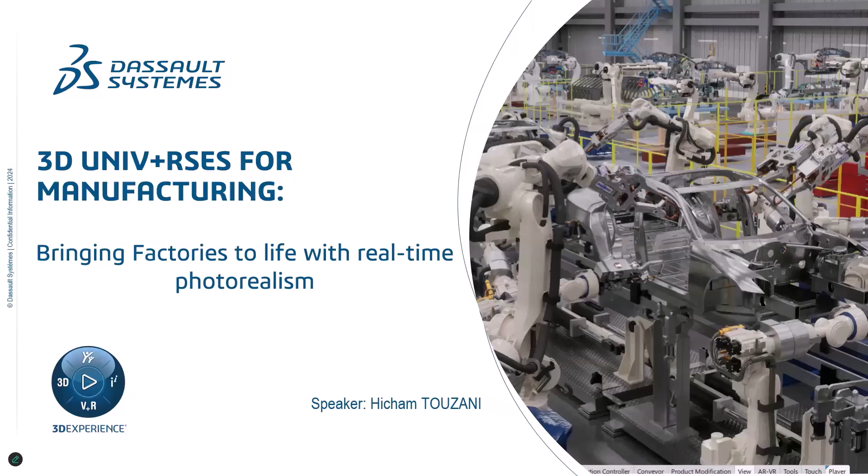I just want to start with a simple but exciting question: what if you could walk through your factory, test every robot, and feel the environment as if it was real? Sounds cool, right? I am Hicham Touzani, robotic expert at Dassault Systemes, and today I'm really glad to show you how we can bring factories to life with real-time photorealism and how it can be applied in your industrial needs. It's not just a demo of the future, it's really happening right now. I'm really excited to walk you through that.

Before we dive into the demo and real example, let me give you a quick overview of what we will cover today. We will start by looking at why photorealism is becoming such a key demand in manufacturing. Then I will walk you through a body-in-white factory use case. We will show how we built an interactive photorealistic virtual twin entirely inside the 3D Experience platform. From there, we will explore the rendering engine itself, and see DELMIA layout capabilities. We will see advanced robot simulation, and at the end, we will end up with the VR walkthrough where you will see the factory from an operator point of view. So if you are really interested to see this, just stay till the end. If it is okay for you, let's move forward.

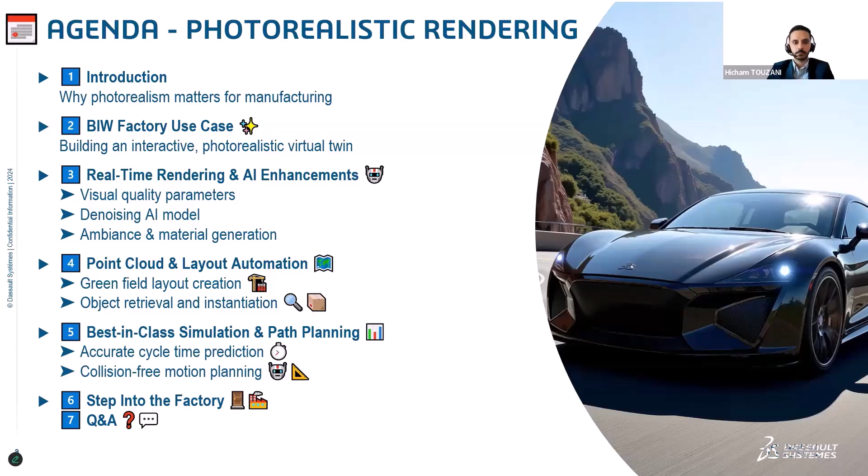Let's now understand why more and more customers are asking for photorealistic environments. The first thing that comes to mind is that it becomes a foundation for AI, by generating high quality synthetic data that can really mimic the complexity and realism of the physical world. You may have heard that more and more projects and customers are shifting from rule-based robotics to AI training, especially in dynamic environments, which drives demand for large-scale synthetic data. I'm referring to vision systems and robots involved in dynamic environments like mobile robots, for example.

The second point is the collaboration aspect, because teams need to collaborate in the same virtual twin, and this adds more context to their work. And of course, the third point is that it can also build trust with stakeholders, because if they can see and understand, then they can validate the concept visually.

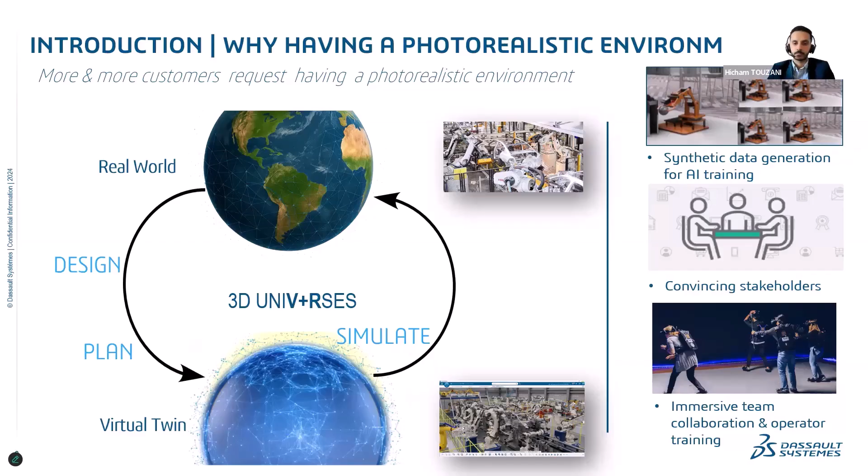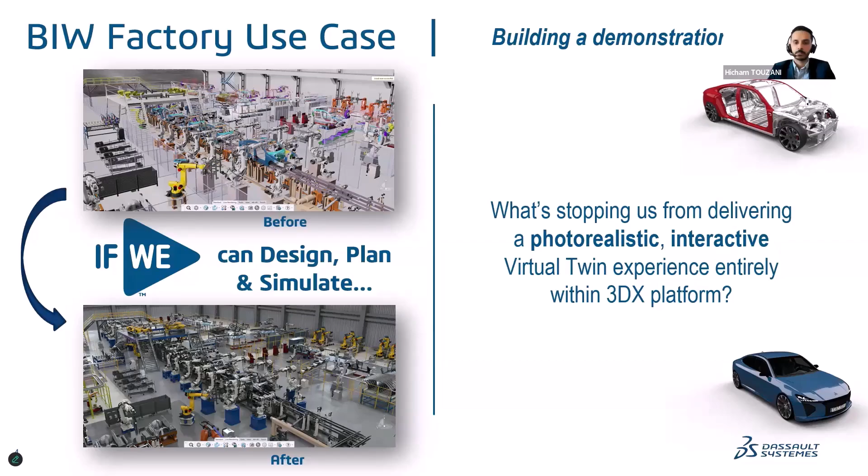Today, this project is a direct expression of Dassault Systemes' vision, where we bring together design, simulation, manufacturing, and collaboration inside one unified platform, grouping together the 7 pillars from the virtual twin to generative experience to virtual companion and to sense computing. In my opinion, this will have a huge impact satisfying the needs of our customers today.

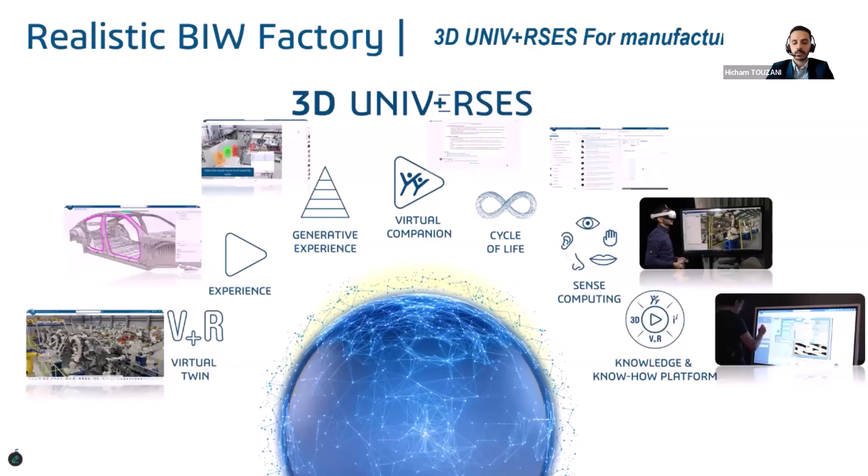And talking about the needs, we have identified three major pain points across manufacturing. The first one is the need for scalable AI training, which starts with synthetic data generation. What used to require massive manual labeling and real world capture can now be generated inside the virtual twin, varying many parameters like lighting, angle, object variation, and environment, which helps train the AI model and make it more generalized.

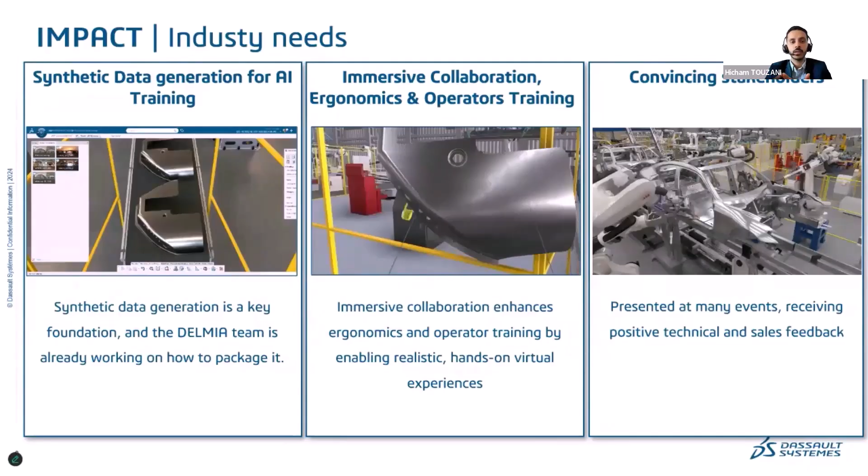The second point is the need to train and onboard operators, especially in complex environments where security matters. Immersive collaboration lets teams practice, validate their ergonomics, and even refine tasks in order to anticipate errors.

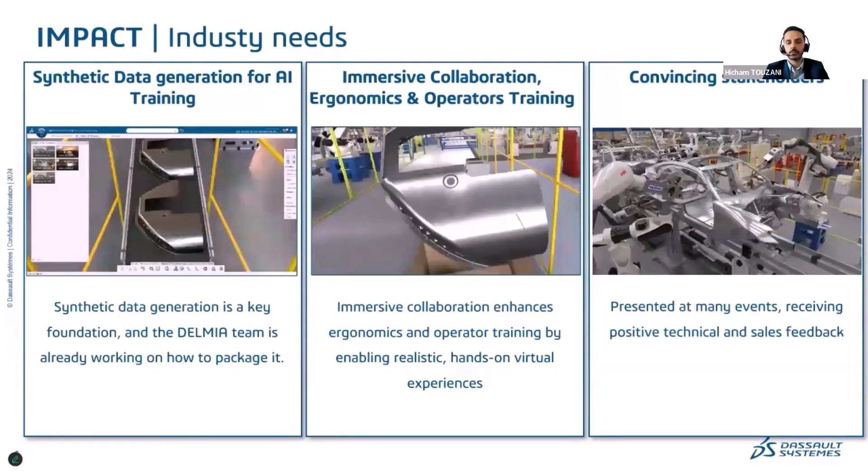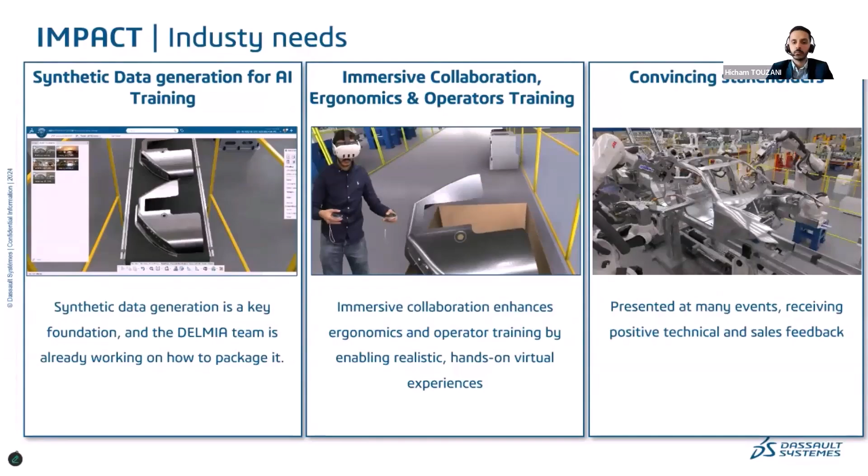And the third point, as discussed earlier, is the need to convince stakeholders, for example for internal sign-off or customer validation. Photorealistic environments make the concept more clear. Just keep in mind that this is where the industry is headed today, and we are already building the tools to meet those needs today.

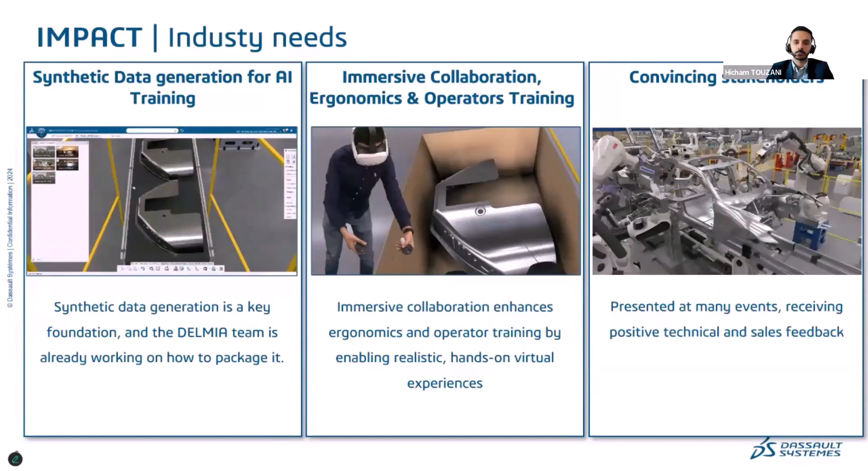Now, let's be honest, visual quality is something people notice immediately. And today we are working with the 3D, so it's the first thing we notice. As you can see, just by varying the ambience, we can see a huge difference.

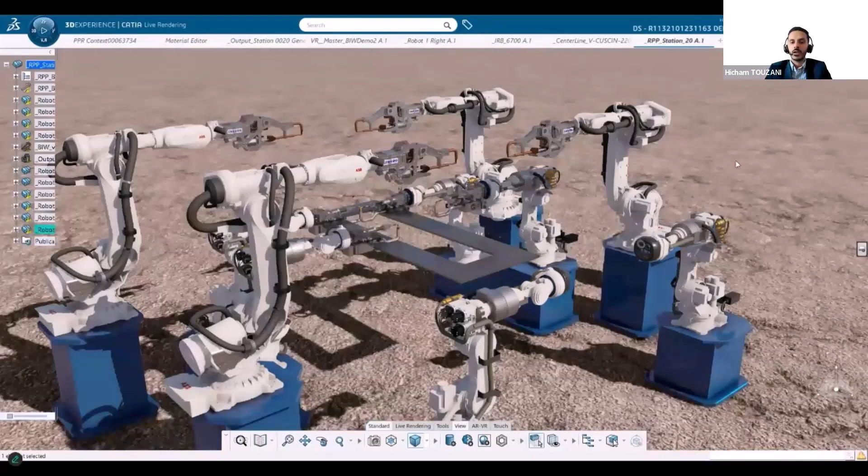We have out-of-the-box functions where we have good rendering, introducing the lighting, the reflection, and so on. As you can see here, we see the reflection just by changing the visual quality, where we introduce real shadows, reflections, and so on.

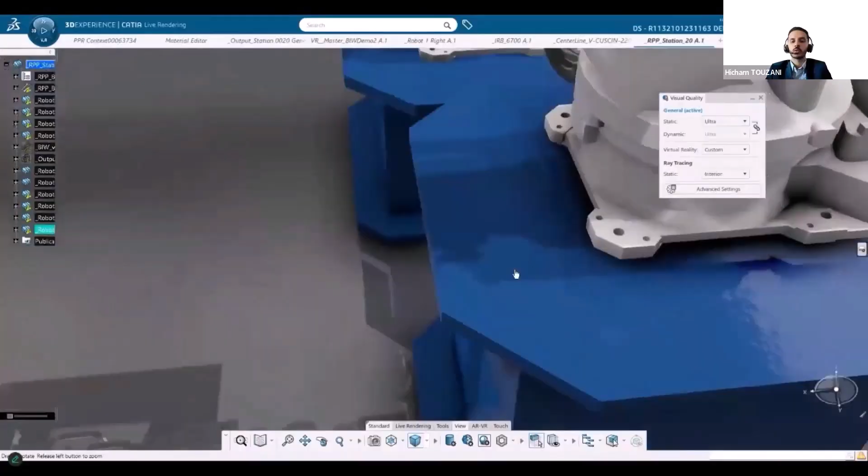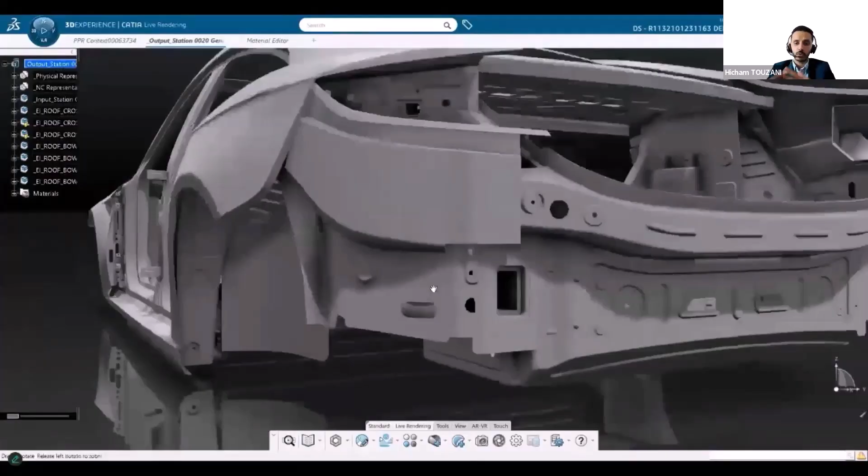So the other parameter is the ambience and the materials. As you can see, we have a wide library of materials, and basically it's one thing to have the right geometrical layout, but when you start applying realistic material like steel, rubber, glass, or paint, and if you choose the correct texture, everything just clicks visually.

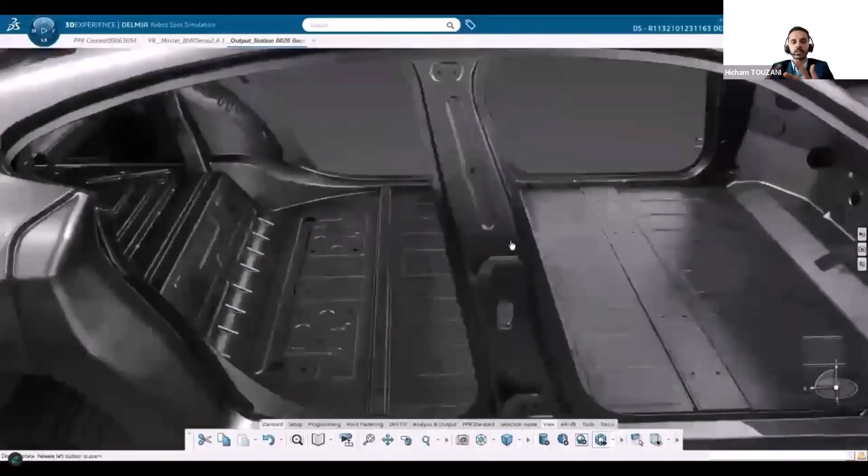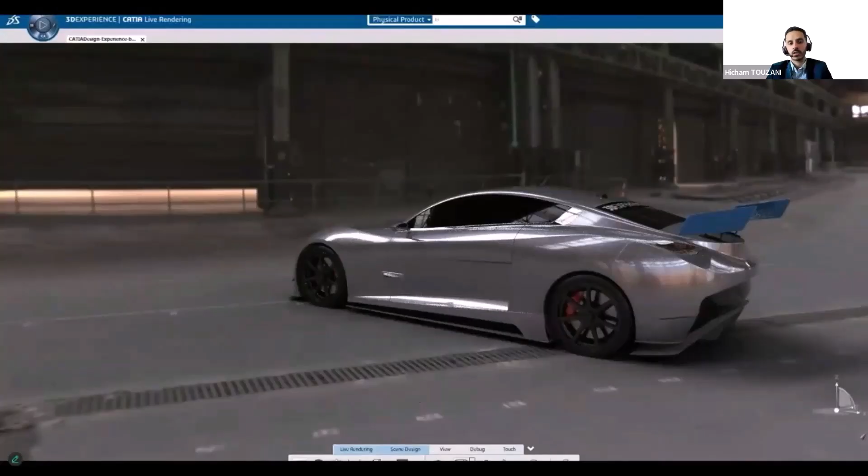So basically, you get really this sense of realism, and this is where you refer to something you have seen in the real world because you have the right materials, the right reflections. And as you can see in this example, we have also a wide library of ambiances that you can really use out of the box.

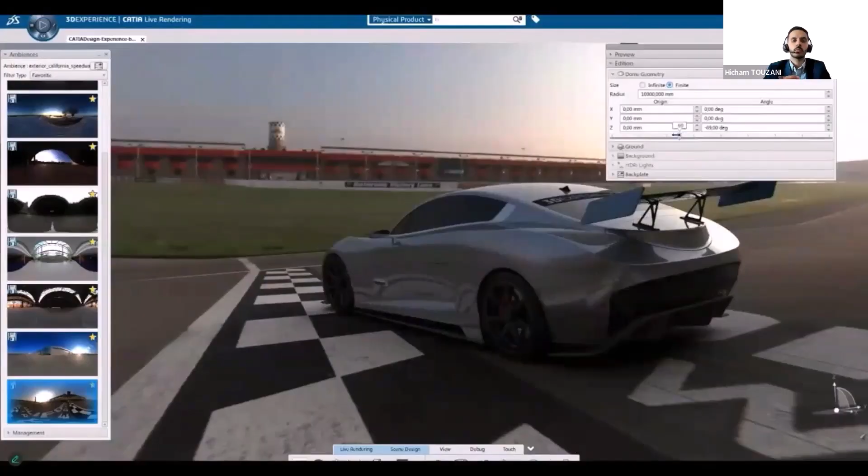But you can also import your ambience from an external source, so we are compatible with that. Here you can see that just by varying the ambience, the lighting changes. So it adds also more realism if you play with the parameters and so on.

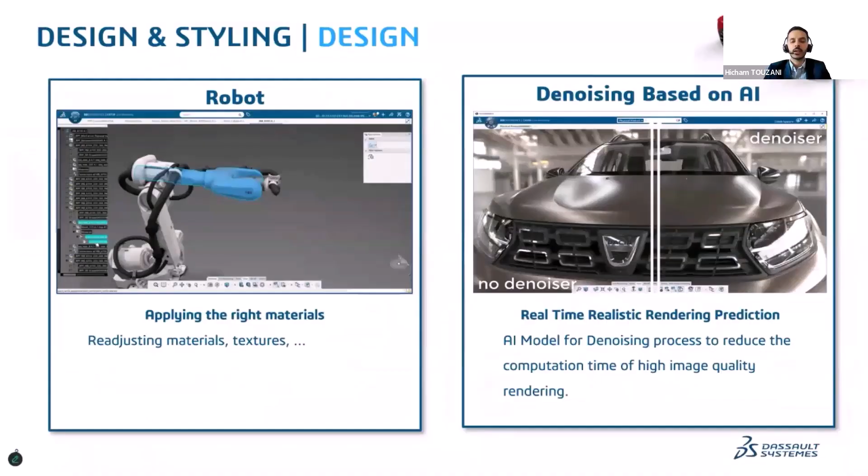So moving to the design and styling, this example focuses on how to import existing materials. So basically, in this example, we play with the texture. I have imported the material that I have created inside the 3D Experience platform. And in this example, you see how we applied this to the equipment, such as the robot in this case.

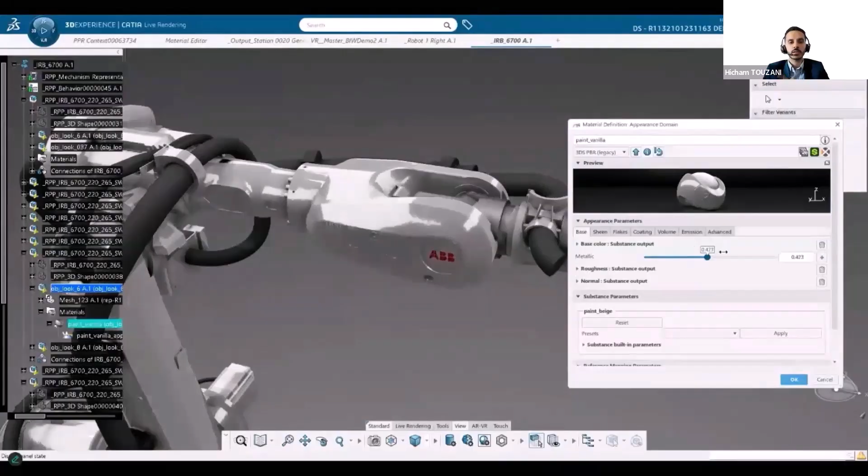I can vary the metallic side of the robot. I can even vary the texture of the robot and so on. So I have created many parameters to make the robot more shiny, more real. This also helped to add realism into your factory.

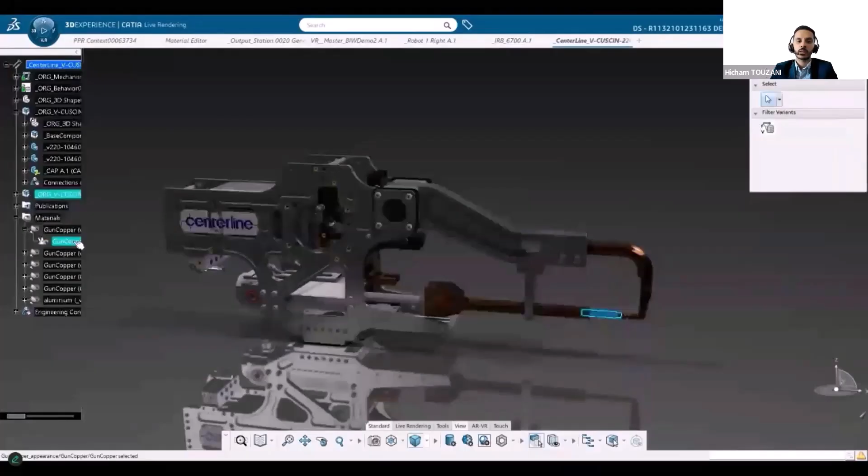And then moving to the weld gun, we have done similar things. So we have adjusted also the materials of the gun and so on. And we did that on the factory itself.

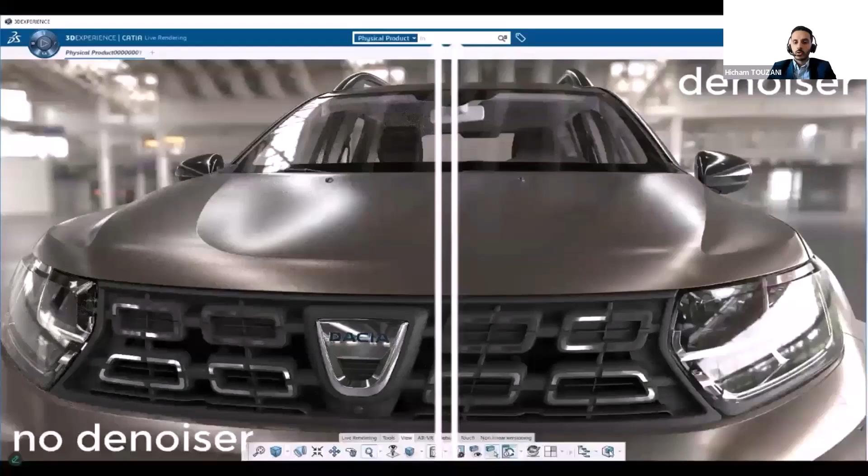So in the second part, we can see how we brought AI into the creative and styling phase of the product design. So we have basically the denoising capabilities, because a high quality rendering usually comes with high computational costs, especially when simulating lighting and reflections. And our AI-based denoising model predicts the final results quality in real time.

So you can see on your left, this is without denoiser. On your right, with the denoiser. You can see that with the denoiser, we are converging really quickly to a final image with a good quality. It's a matter of 1 second or less. We are converging really quickly to this. So all of this to deliver photorealistic visuals.

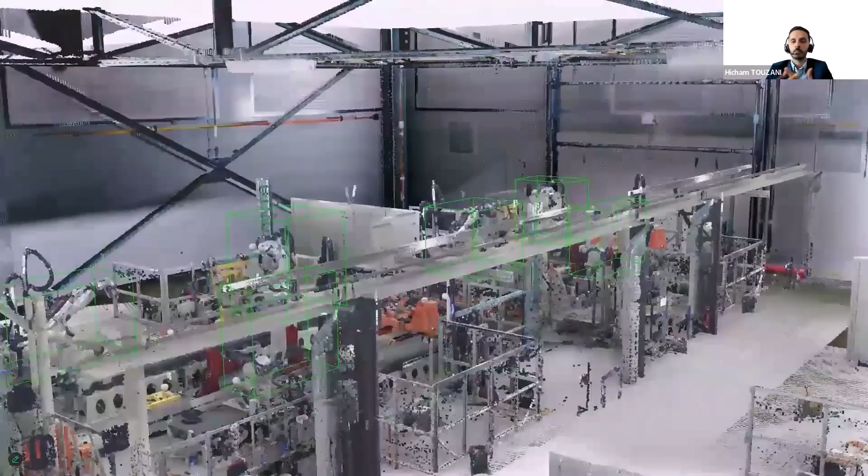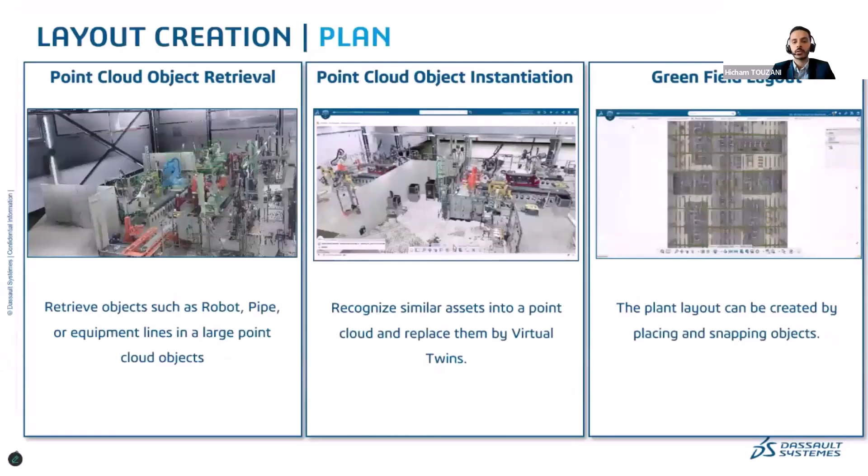So starting with the layout creation, we can see on the left, we start with the point cloud object retrieval. So we import our point cloud, and we can also use our AI capabilities to detect objects in the scene, like robots and so on.

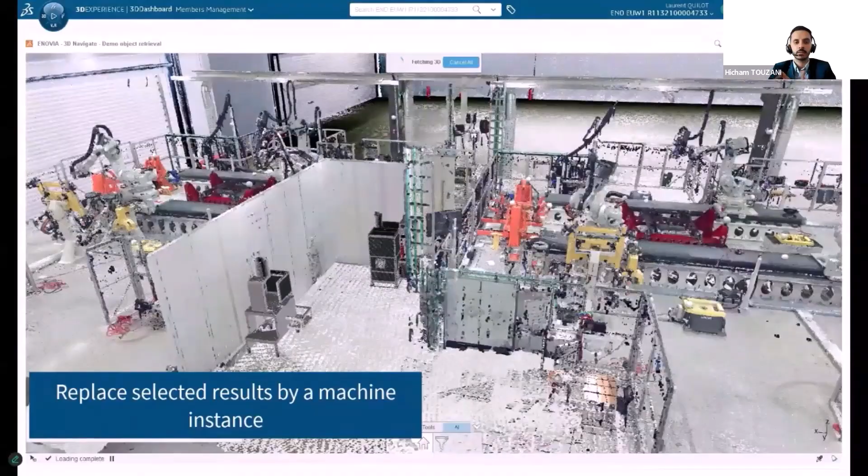And we even go further by identifying the objects that you have in your database and replacing them altogether. So if you have many pieces of equipment inside your scene, we are capable of first identifying them from your database and then replacing them directly on your point cloud. But of course, you can still use also the point cloud for collision detection and so on.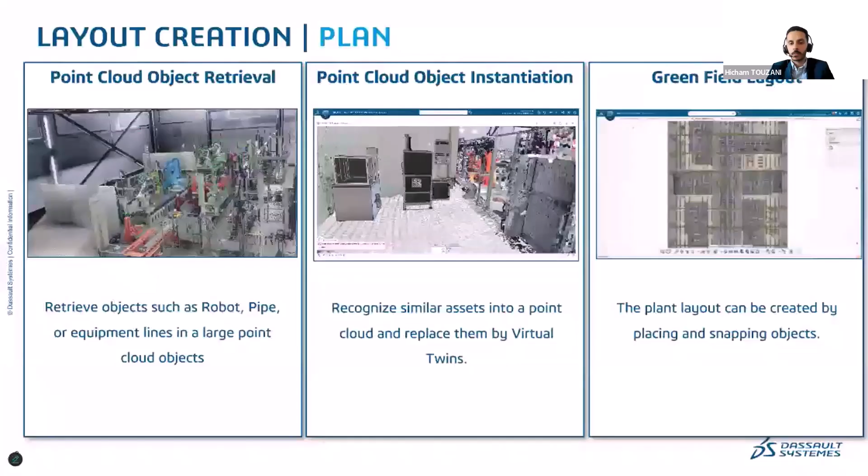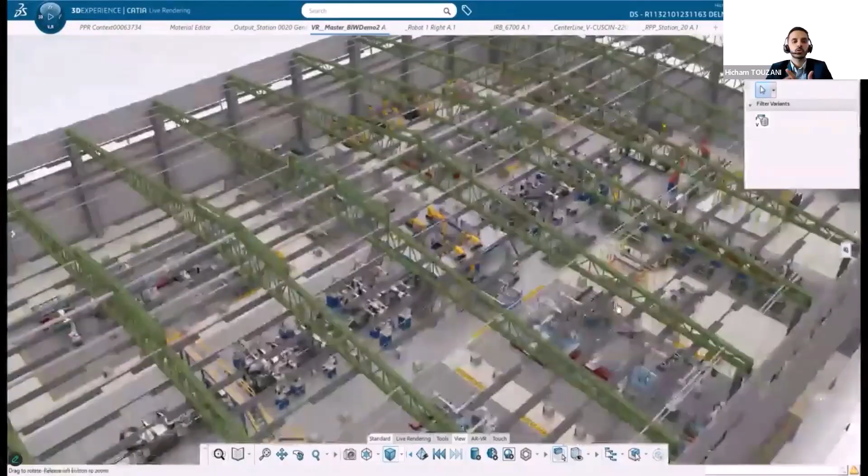So the third part is, I would say, the scope of this project, because we started from a greenfield where we have used DELMIA plant layout solution in order to build such a factory. So we have used all the capabilities that we have inside DELMIA layout, the snapping capabilities, the measurement, 2D sections, and so on. This was really helpful in order to create such a virtual twin.

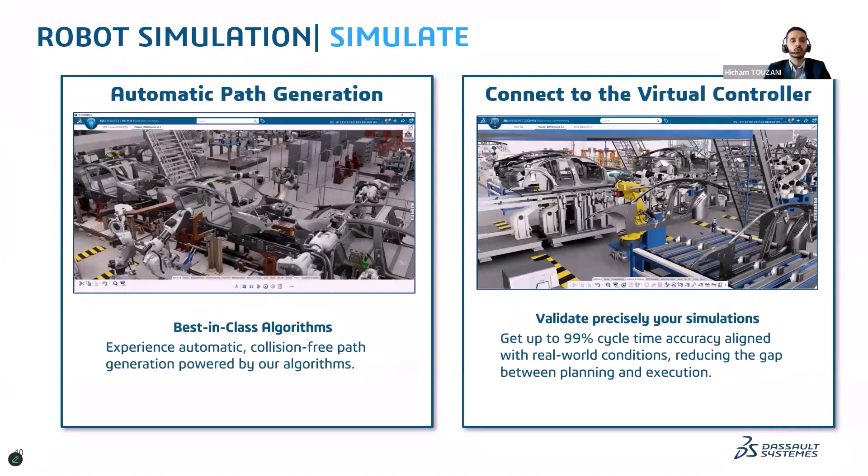Okay, now moving to the robot simulation part when we need to simulate. So basically, we have used also best-in-class algorithms proposed by DELMIA in order to simulate, but also to generate the path automatically. I'm picking this example because it's really interesting.

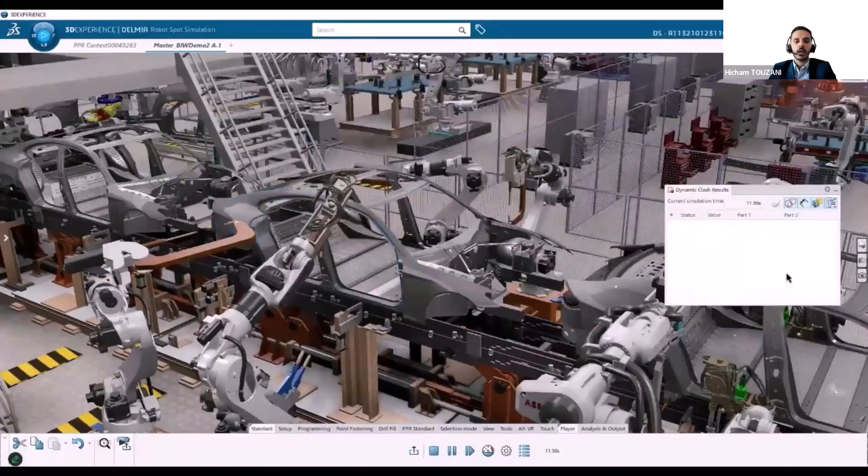Starting from a task where we had many collisions, as you may see here in the screen. We start from this task when you have only spot operations in your task. You may have also some home position from the top to the end. And here you can see that it's not really an obvious movement to solve.

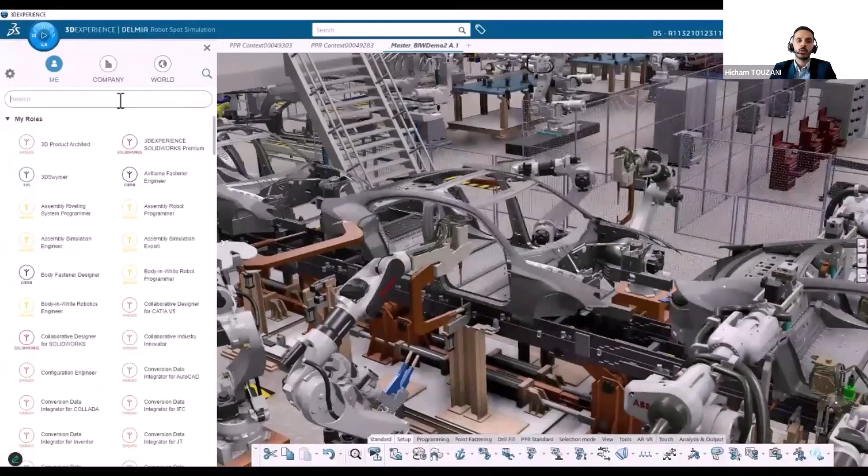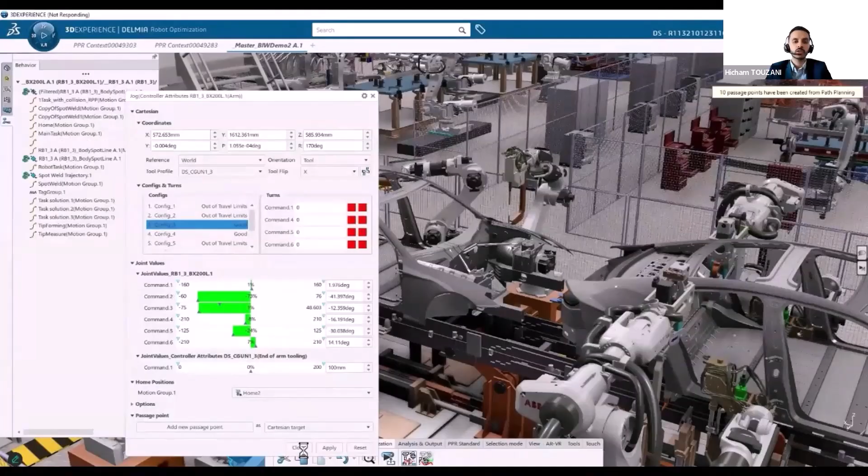Here we are just having spot operation in our task. So we are giving it as input, and we are using our robot optimization app in order to solve that. So basically, instead of doing the via points manually, our algorithm is able to do this for you. It's automatically generating via points between the spot operations where you have the collision, first in order to solve the collision, but also in order to minimize the cycle time.

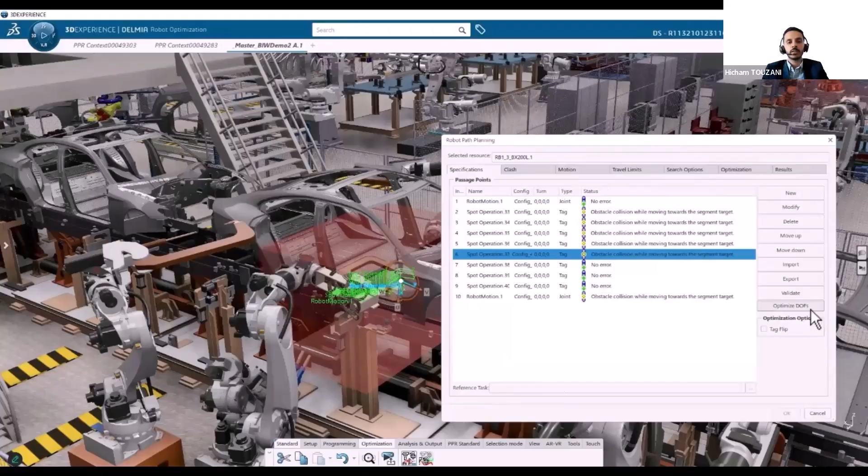As you may see, we can start first by validating the initial task or validating the input task. Basically, it will check if everything is okay or if you have any collisions while moving towards a segment target. We can even go further by optimizing the degrees of freedom. To reach a point in space, you may have more than one configuration, and optimizing the degrees of freedom means we will reduce the configuration changes, which can be unnecessary in some cases and can also drastically reduce the cycle time.

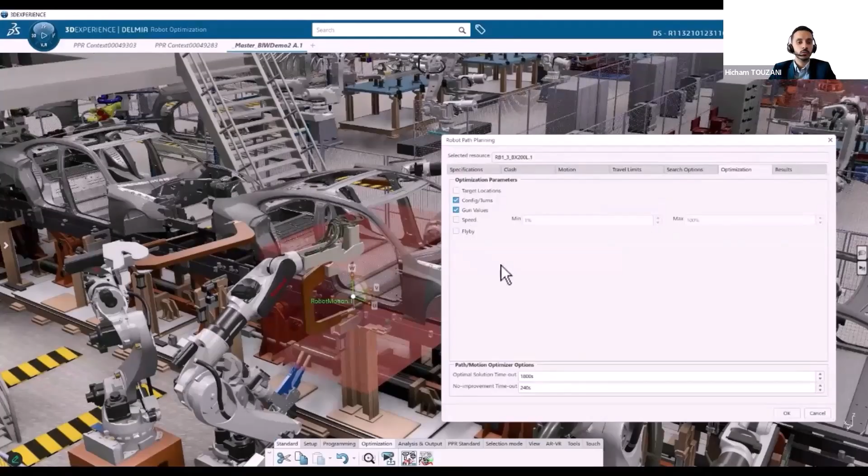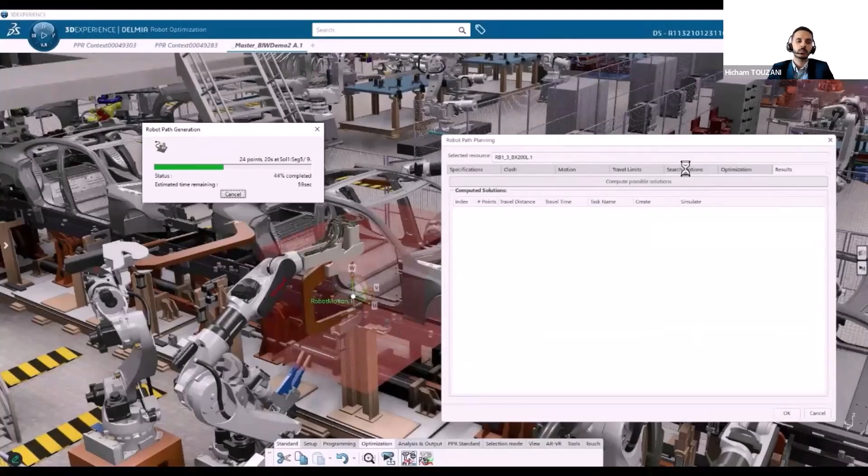But we can also go even further because we can include gradually, or even at once, a lot of constraints such as the gun values, so the opening and closing of the gun. We can introduce the config and turns and even add some flyby motions. So as you can see here, we just compute our task to get a task free of collision, but also the algorithm is picking for you the best trajectory, which minimizes the cycle time.

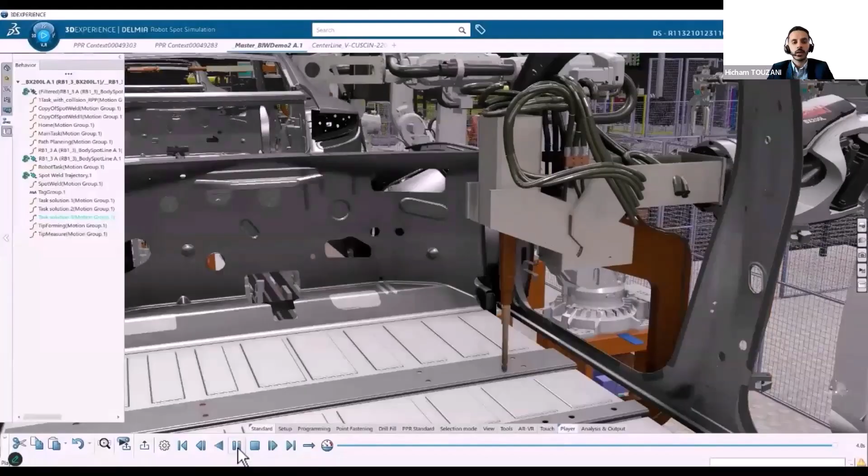So after some calculation, we will see how the algorithm will introduce the via point. The algorithm is checking for the best possible option, and at the end we have one task without any collision while minimizing the cycle time. As you may see, the algorithm introduced automatically the via points. It introduced also the opening and closing for the gun, so the 7th axis of the robot, and everything automatically. This saved us a lot of time in order to simulate our robot inside this virtual twin.

The other part is connecting to a real VRC. So you can see, with such photorealistic visuals, we can even work in it real time. We can connect to the VRC, virtual robot controller, and in this case we picked the FANUC robot.

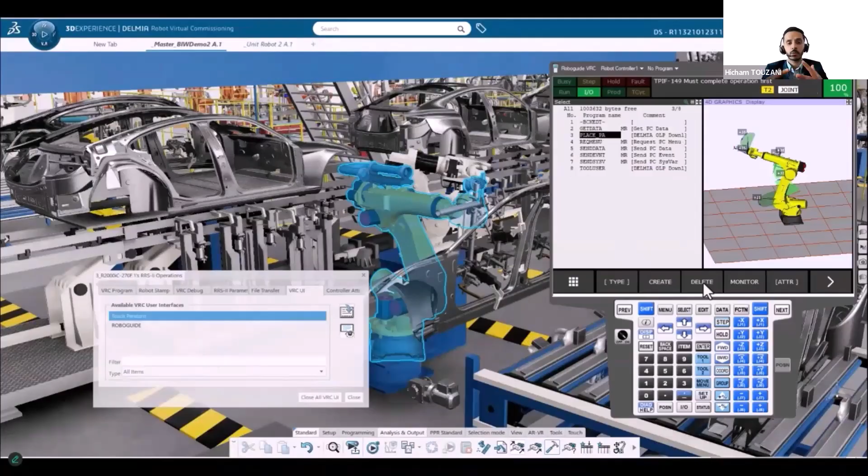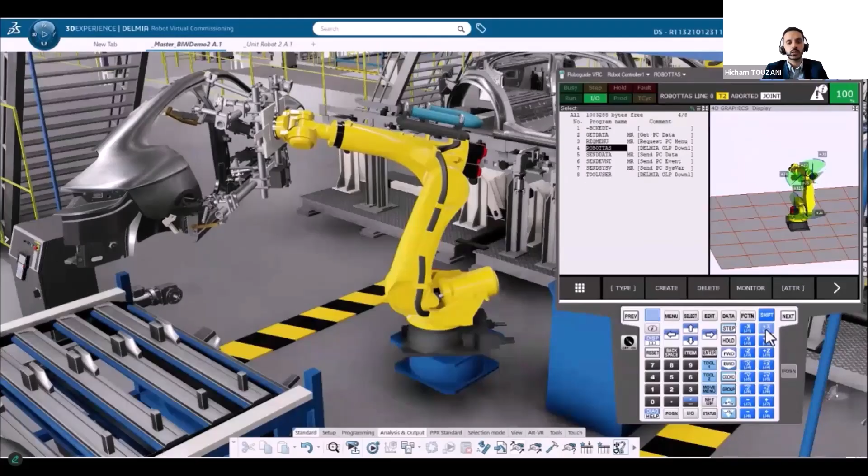You can see that we can even start the teach pendant from the 3DEXPERIENCE platform. Basically, so we can transfer the robot program, like from a backup or something, or even teach the robot. So you may have operators that are really familiar with the FANUC teach pendant, so it can be used also for training in the virtual twin by using the real teach pendant. As you can see here, we can teach the robot as the following.

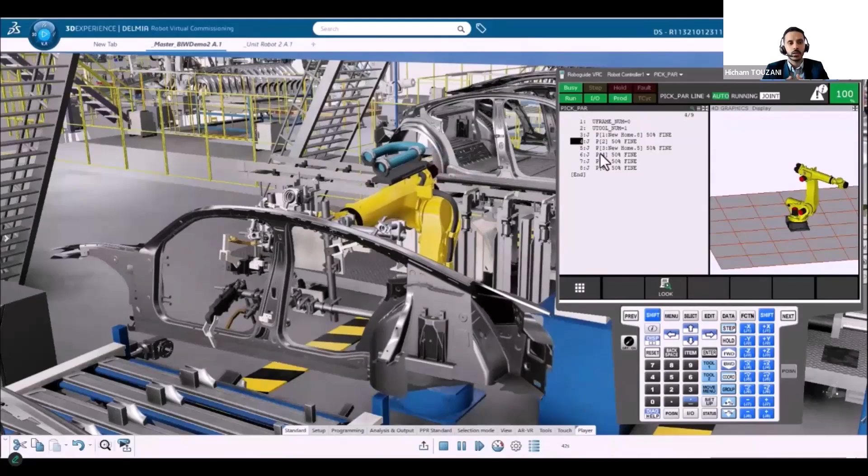And basically we can also do more than this, because starting from DELMIA, you can do your program in DELMIA, you can create your task, and we will translate everything in the background and send it directly to the VRC. So basically what you have to do is just click to pick your task, connect your VRC, and then click on play, and we do everything for you. It's transparent for the user because the translation and the sending to the VRC is done in the background.

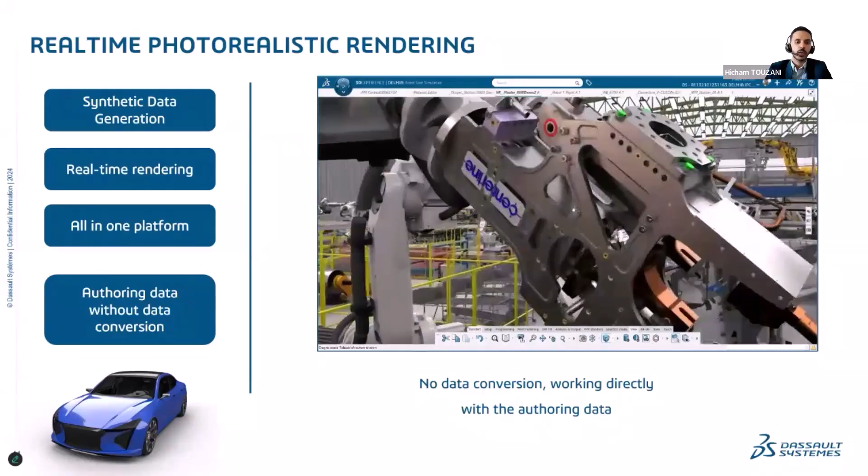And coming to the real-time photorealistic rendering, one of our differentiators is that we are real-time. We do everything all in one platform, and we are working directly on the authoring data, which means no data conversion. So we can design in CATIA and then move to DELMIA for simulation or planning, then go to the virtual commissioning when you connect to VRCs, when you have your virtual twin and your PLCs all interfaced in one platform. This is a huge differentiator that we are proposing today.

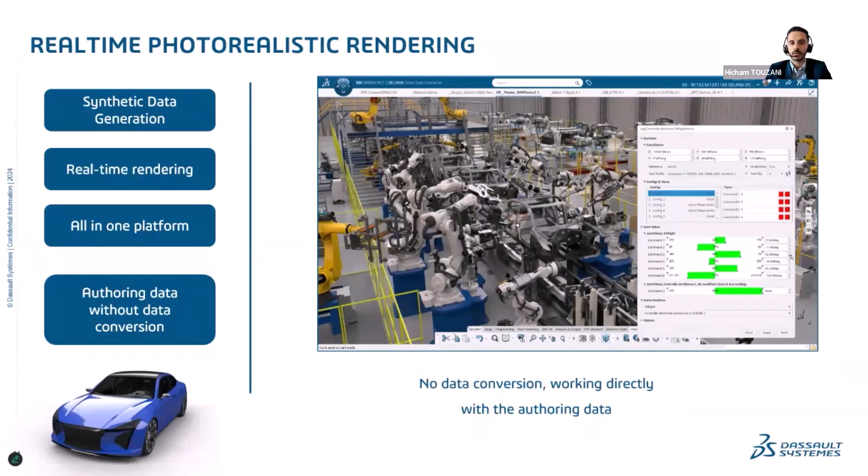So what I propose now is to let you watch a video explaining more the journey from the design to photorealistic simulation, where you will learn more about how we started and how we get to this photorealistic simulation. So just enjoy.

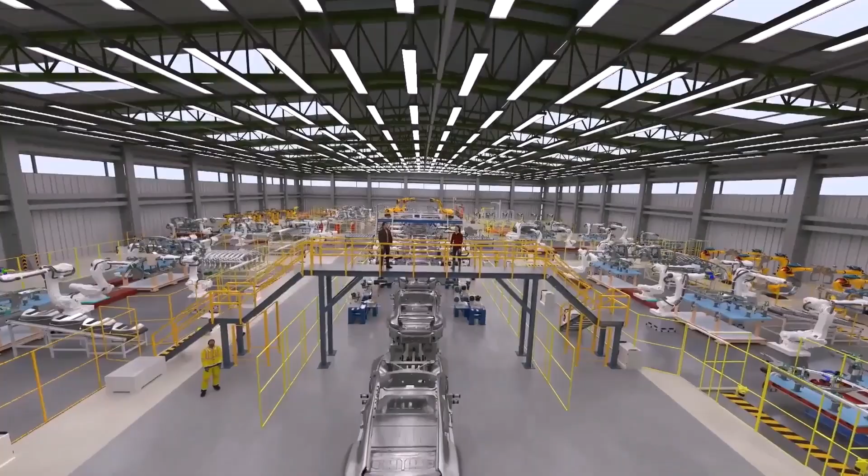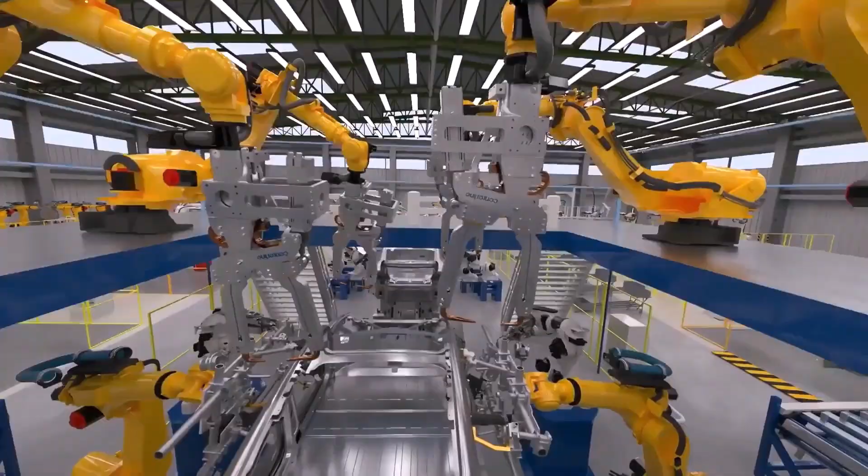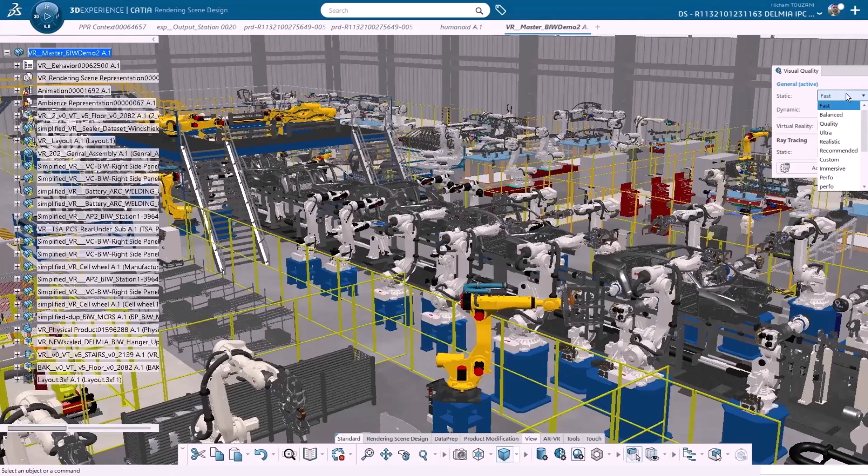3D Experience is redefining industrial digital twins by bringing design, simulation, and real-time collaboration together in a photorealistic 3D universe, opening a new era of immersive manufacturing. From the structure to the last robot weld, every detail is accounted for, visualized, tested, and validated before a single machine is powered on. This is not a render. This is the future of manufacturing, authoring in real time with full fidelity. Welcome to the 3D universe powered by the 3D Experience platform.

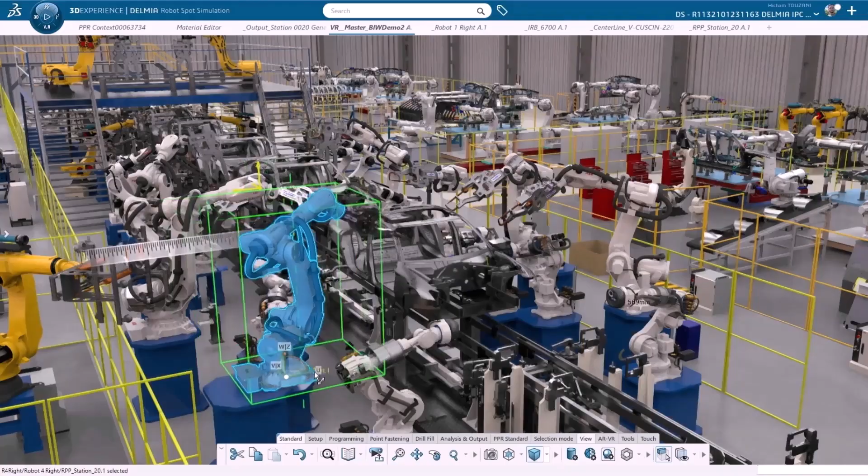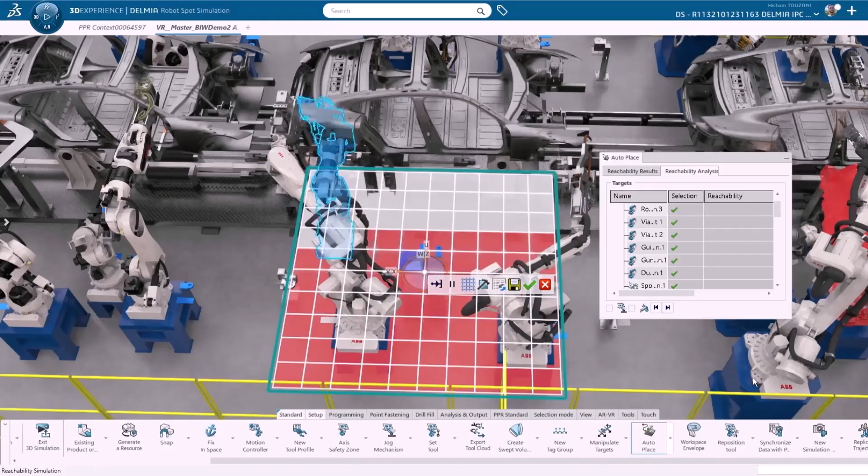In today's fast-paced industrial world, success depends on your ability to move from concept to execution without friction. That's why we've unified best-in-class technologies: CATIA for design and DELMIA for robotic simulation, all in one platform, in one data model. No imports, no conversions, no compromises. The 3D universe is not a visualization tool. It's a live, interactive virtual twin where engineers design, simulate, and optimize manufacturing logic directly inside the operational environment. Whether you're planning the factory layout or refining multi-robot interlocks, every move happens in context, accurate, reactive, and ready for production.

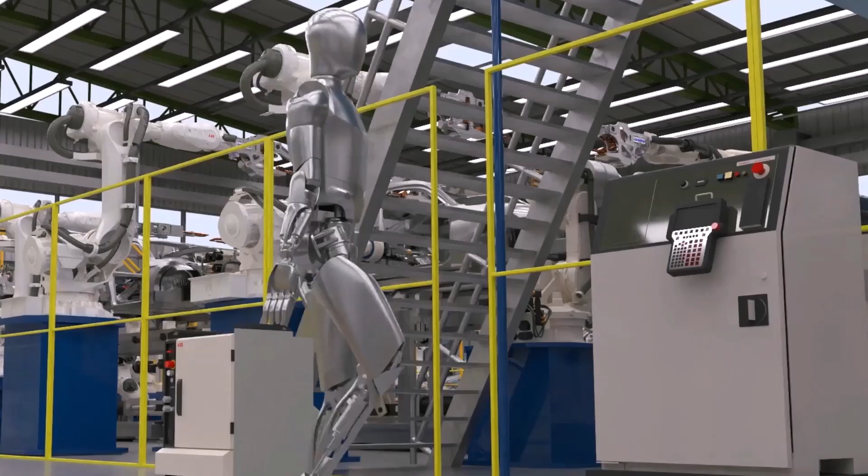But the value goes far beyond simulation. This immersive twin becomes the foundation for AI with synthetic data generation, feeding smarter logic into robotics, vision systems, and production analytics. You don't just simulate reality, you use it to train and improve.

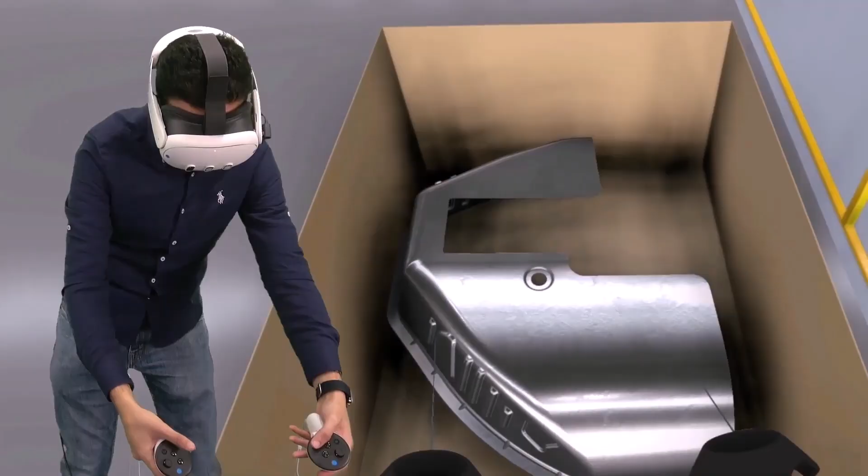Operators step into the process early, practicing tasks, validating ergonomics, and identifying risks, all within a high-fidelity, immersive environment. When teams work inside the same twin, whether in design, manufacturing, or logistics, collaboration becomes immediate and grounded in real processes. This is manufacturing without guesswork.

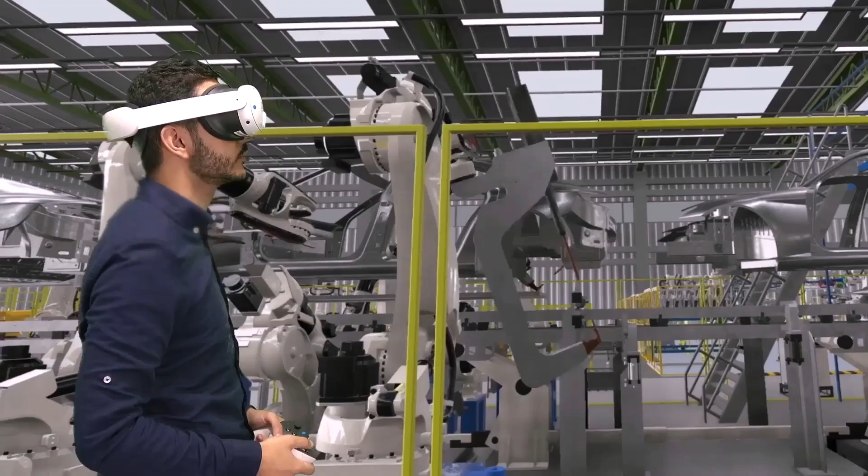A virtual twin built not just to impress, but to produce, improve, and evolve. It's a new foundation for manufacturing agility, powered by unified authoring, real-time simulation, and immersive training only possible inside the 3D Experience platform.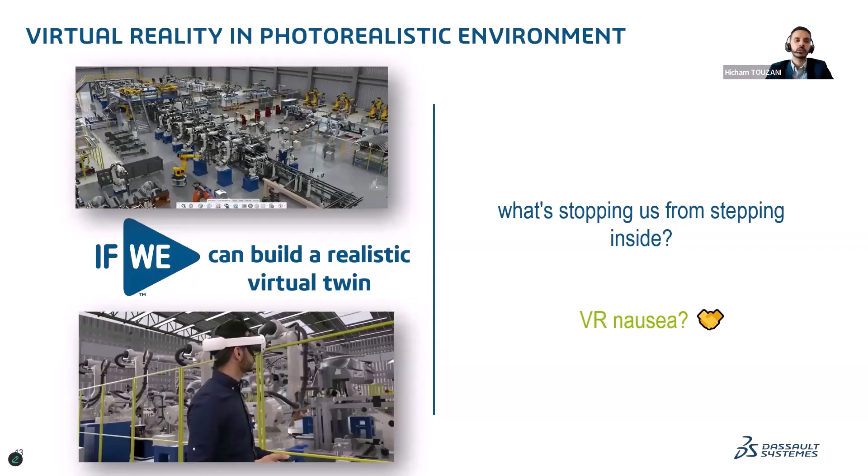But before, I will be showing you all our capabilities in VR today, or at least the best functions that we have today, starting from simulating and animating your task. So basically, you can reuse your task or simulation in DELMIA inside the VR. You can simulate using our VR for manufacturing function, which enables you to simulate and animate all the tasks that have been performed, in order to discuss with colleagues and anticipate even for errors.

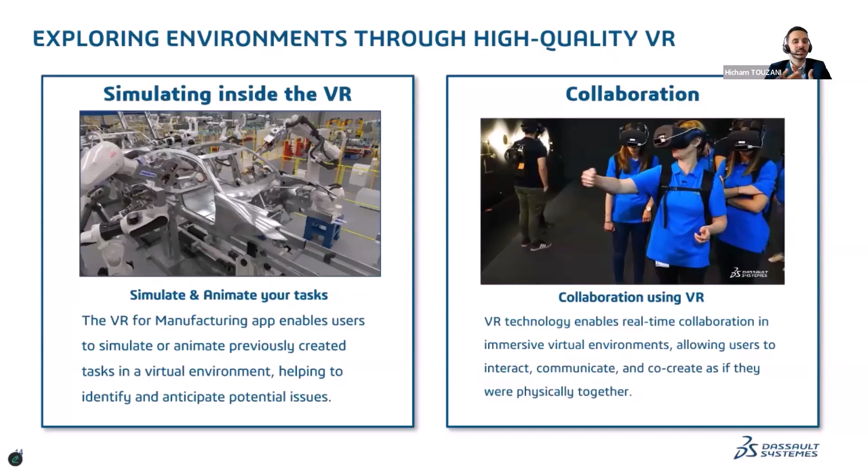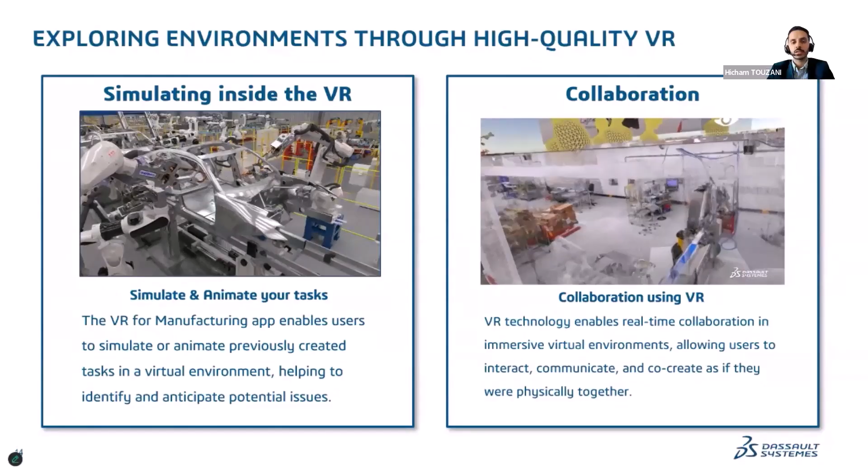On the right side, you can see that we can also propose collaboration inside VR, where your teammate or colleague can be in one site here and another in a different country, but you meet inside this virtual twin to have more conceptual vision. You can start challenging the layout even before it will be built physically. Of course, this concept is really useful, especially when you collaborate with teammates. This adds more value when you work inside the virtual twin.

And also you can even go further by interacting with objects in VR. So think about a meeting inside the VR, and you may want to challenge a layout. You need to propose or snap some equipment inside the virtual twin to see if you have blocking issues or if you need more space for your process, and you want to do this directly into the VR. This is also possible.

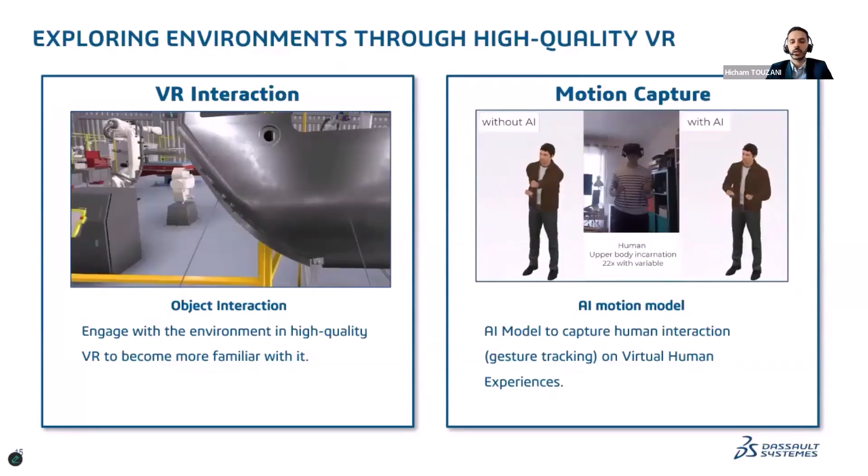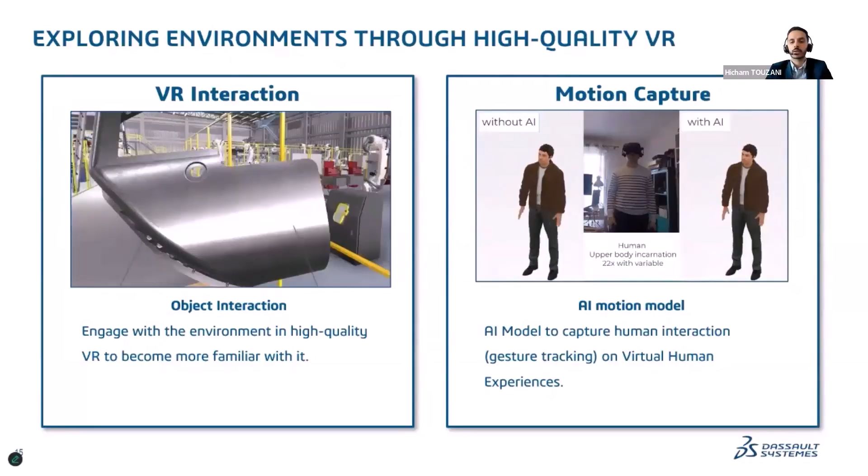You can also use this for ergonomics issues, to know exactly how it will look like in the real world. And on the second right side, you see that we have the human design, where AI enhances gesture and motion capture for virtual humans. This allows us to simulate realistic human interaction in immersive environments, for example to validate user ergonomics, to improve posture or other interactions with the product. Our AI model increases the realism and fluidity of human avatars, which is really interesting.

So to summarize, VR with high realistic rendering helps with ergonomics, helps train your team or operator, and improves team collaboration. And now, as promised at the beginning, I will give you the opportunity to put your virtual headset and step with me inside the factory from an operator point of view. So let's do it.

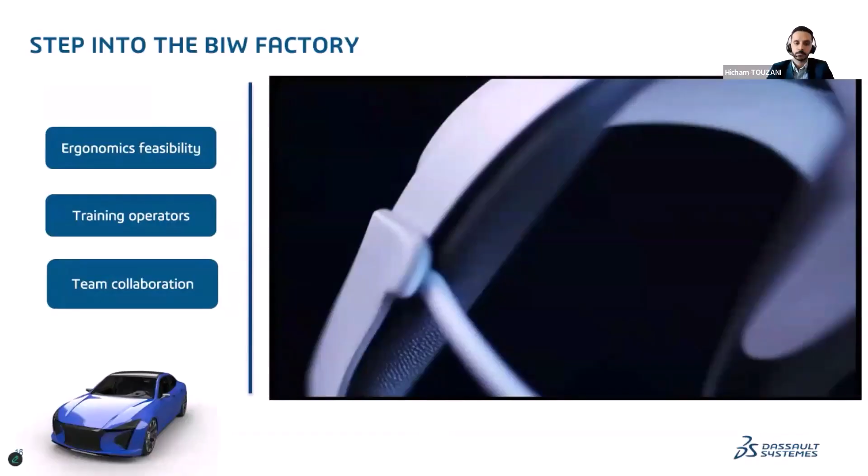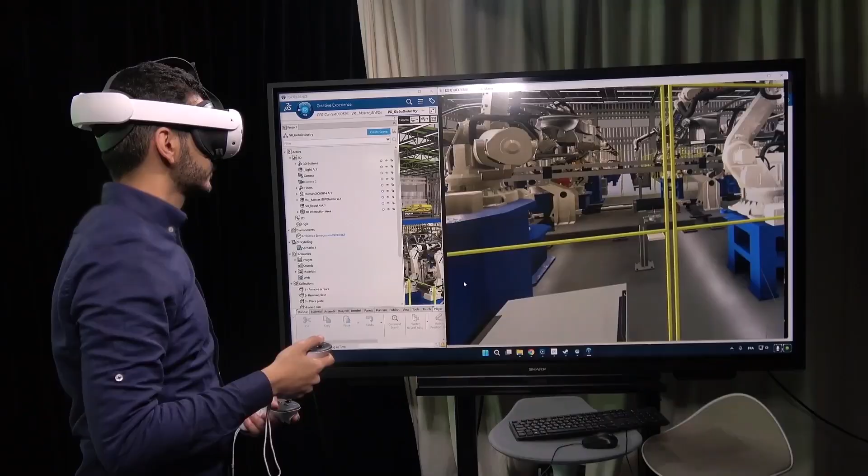Manufacturing is evolving, with immersive reality driving greater efficiency. Today, join Hicham, a robotics expert at Dassault Systemes, as we step inside an automotive BIW factory, where every stage, from design to validation, was developed within the 3DEXPERIENCE platform. Let's see how VR transforms how teams collaborate, validate, and optimize production.

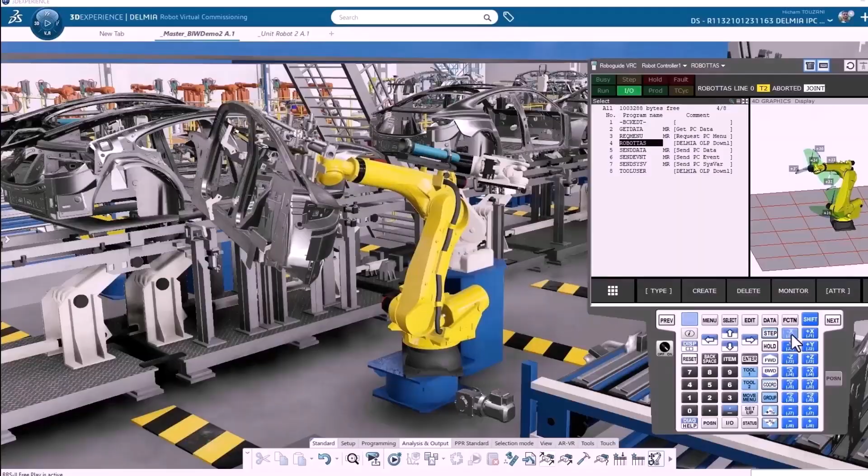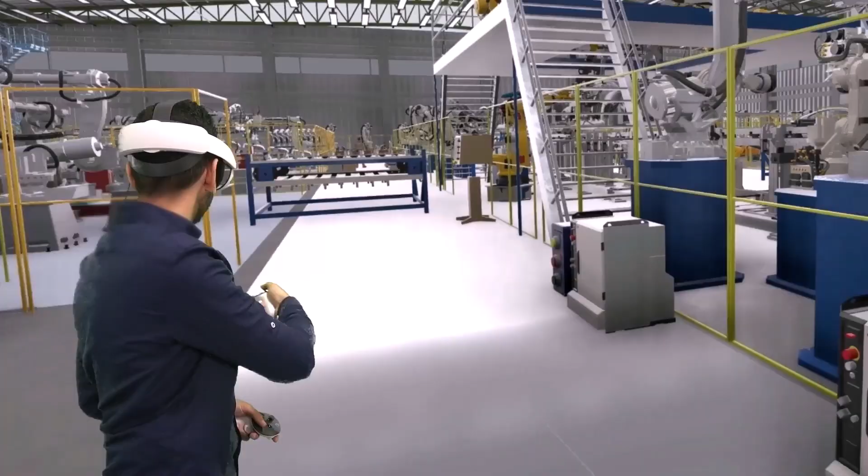In this first scenario, we enter a fully simulated BIW assembly line. Designed in CATIA and programmed, simulated, and validated in DELMIA, this virtual factory allows teams to assess every process before physical implementation. Using VR controllers, engineers can navigate the shop floor, take precise measurements, and interact with the environment in real time. By animating the robot's movements using DELMIA's programming, engineers can identify layout issues and immediately discuss potential solutions.

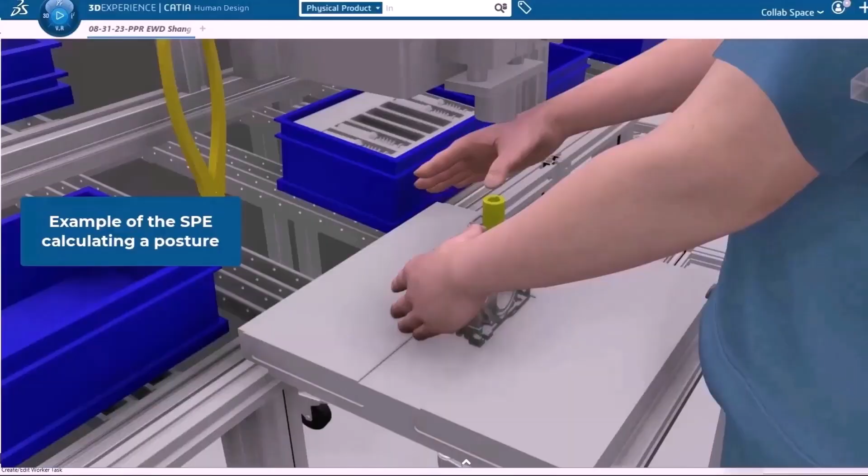With VR, factory layouts become dynamic, enabling engineers to reposition workstations and adjust structural elements. Operators can experience human tasks in virtual reality, practicing their movements and actions before entering the physical factory. By simulating realistic environments and tasks, they gain hands-on experience and familiarize themselves with industrial processes, all within a safe, immersive training space.

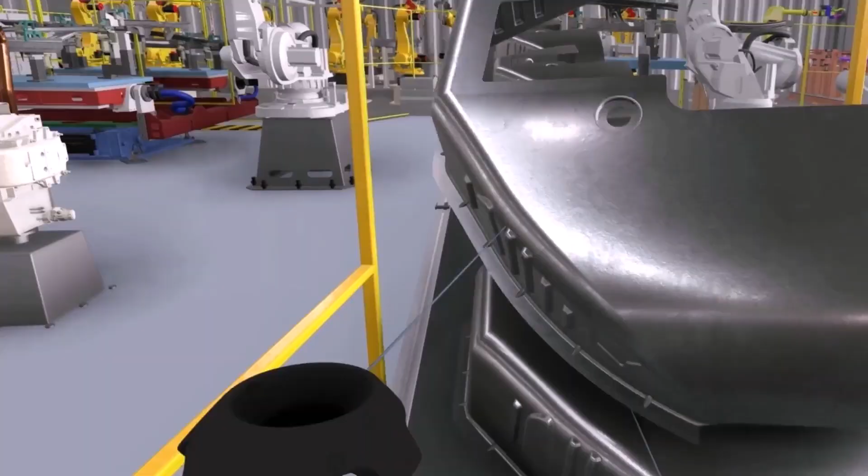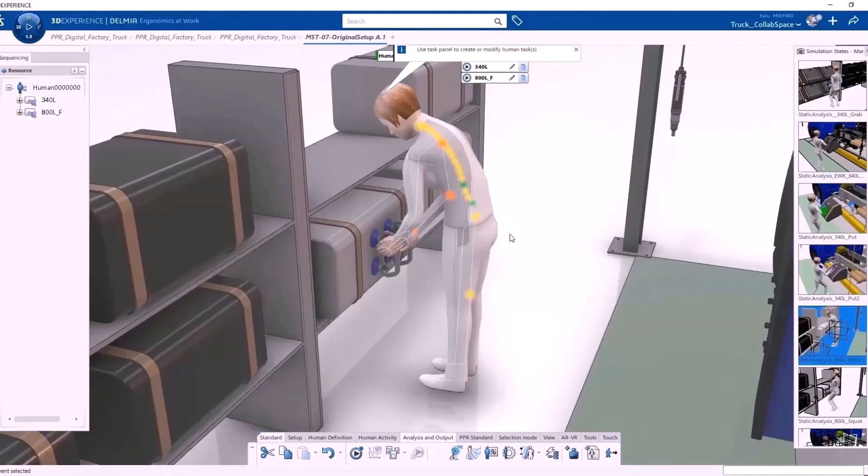VR excels in testing emergency scenarios. Here, we stop the production line to simulate an urgent situation. Engineers and operators can practice interventions in real time, ensuring they're prepared for unforeseen challenges. Operator safety is a priority. VR lets engineers simulate human movements in real-world tasks, such as overhead welding or heavy part lifting. By replicating reachability and strain, potential ergonomic risks are identified early, helping to reduce workplace injuries.

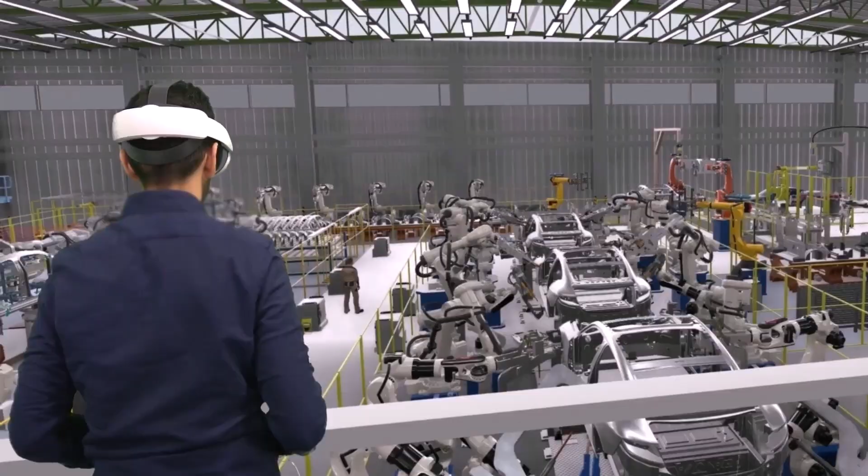Teams gain spatial awareness and collaborative agility that flat screens simply cannot replicate. From faster validation to fewer physical trials, immersive technology is transforming factory operations. Want to accelerate your industrialization process? Explore the power of VR with 3DEXPERIENCE.